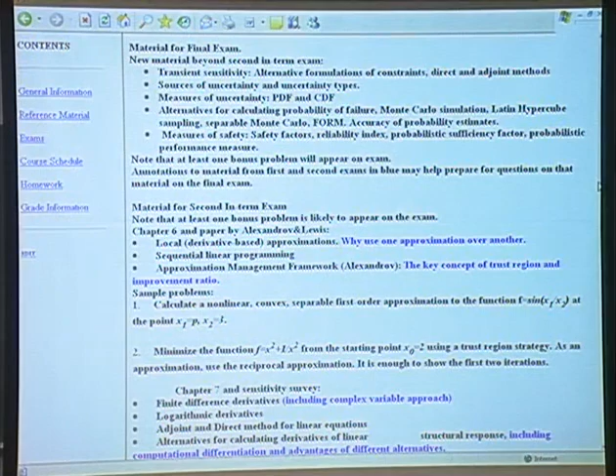What else? Yeah, so I put on the material for the final exam, and I added the new material, and also I added annotations. I was looking to see if I left out any methods that you may want to study, but I didn't find much. So let's first go over the new material. The transient sensitivity didn't appear in the second in-term exam, so that's the only material from the textbook which is in this additional material.

And so then we have the material on uncertainty, which are sources of uncertainty, measures of uncertainty, alternatives for calculating probability, and measures of safety. And again, one of the bonus problems will appear on the exam. And then I put in annotations for different approximations. For example, I said, why use one approximation over another? This was a problem in the test that people didn't pay attention to the concept of improvement ratio. I added the complex variable approach, and I also added the computational differentiation and advantages of different alternatives.

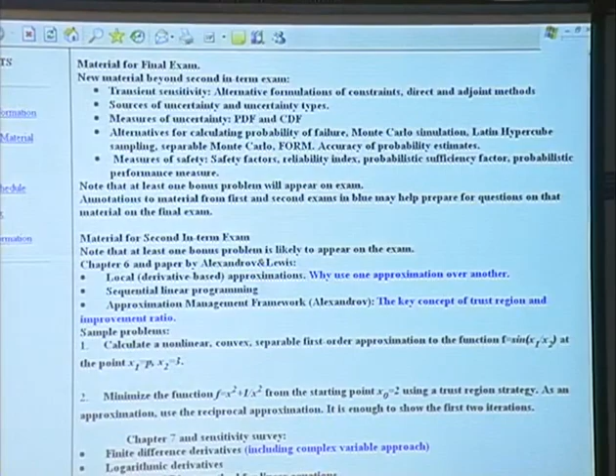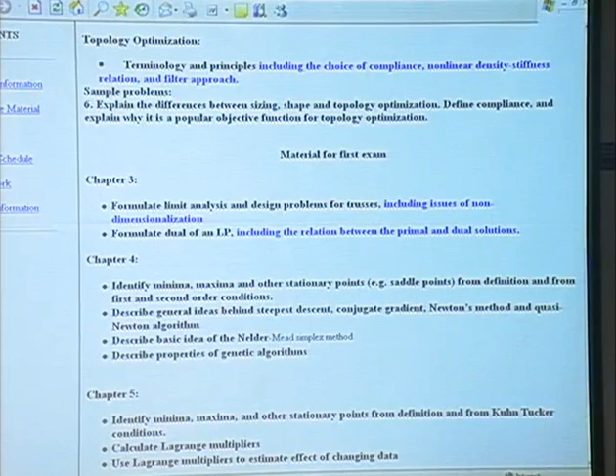In the topology optimization, I put in the same things that appeared on the exam. From chapter 3, the issues of non-dimensionalization and the relationship between the primal and dual solution. For example, that the primal is the dual of the dual. That is, the x's are the Lagrange multipliers of the constraints appearing in the dual formulations. I think that that's about it.

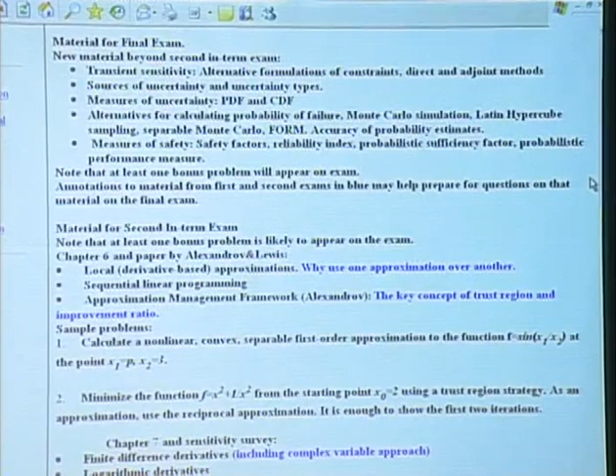So what I'm expecting to use the next few minutes is to deal with any questions that you have on the material or on the exam. Yes? I'm assuming that the time of the exam is 7:30 a.m., not p.m. Oh, yeah. Did I make a mistake or didn't I simply specify? You didn't specify. Oh, okay, yeah. Well, I just picked it up from the exam schedule. Yes, actually, I probably would have liked it better if it was 7:30 p.m.

Other questions? Yes. Grading. So whatever points we have now will be scaled down to 65 points, and then the final will be plus 35, or? Well, actually, it's going to be a bit more in your favor in that the bonus points are not scaled down. Okay. So you take your grade without the bonus point, multiply it by 0.65, take your exam grade times 0.35 and add the bonus points. So it's a bit better than...

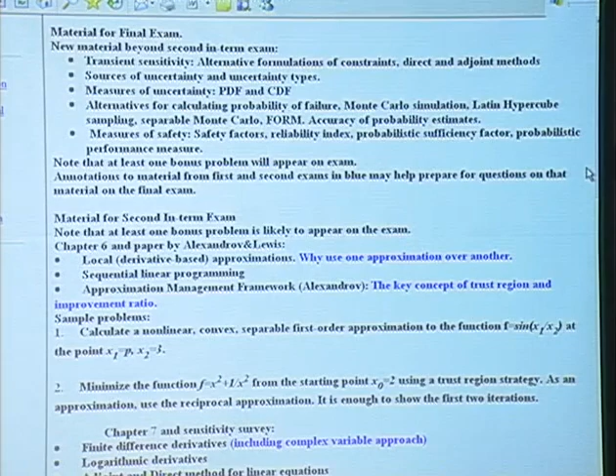That is, you have the options of doing the other problems too. And for example, if you are completely at a loss how to do the new problems, it may be to your advantage to do some of the old ones. Or you can have a less extreme case where the old problems are easier than the new one, even if you are not completely lost.

In terms of time, I'm hoping to avoid the time crunch. We have more than twice the time, that is 120 minutes compared to 50 before. So I'm aiming to increase the time over a midterm by about 50% instead of by 140% or so. So that hopefully you will not have to work feverishly until the last minute. Other questions? I'll give you a couple of more minutes to think about questions before we adjourn.

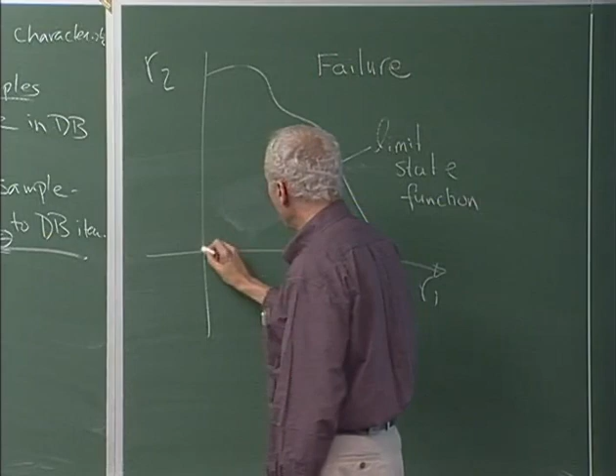And this is, let's say, failure. Sorry, the other way around. This is failure. The origin is the place where the random variables are at their mean value, because we assume that they are normal variables with a 0 mean and a standard deviation of 1.

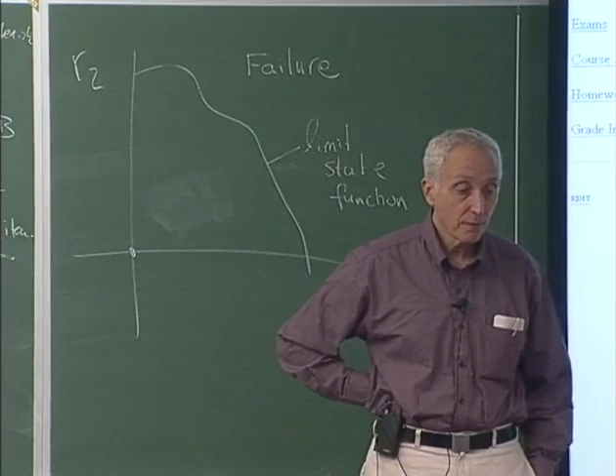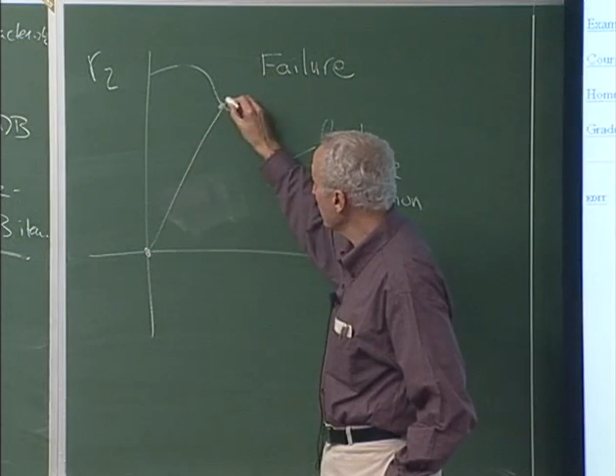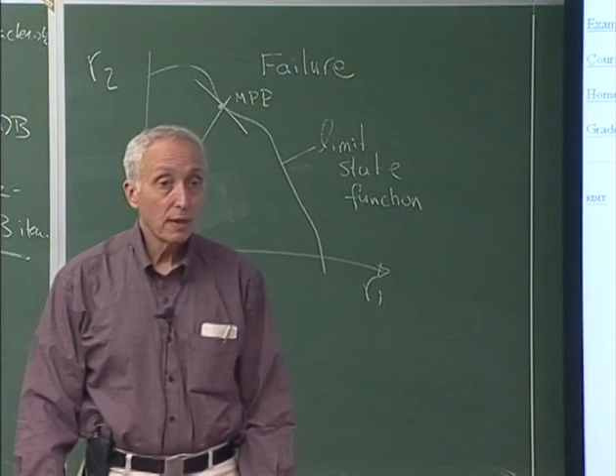And the point which is closest to the origin, in this case it will be this point, is called the most probable point. And we linearize the limit state function about that point, and then you can show that this distance is the reliability index.

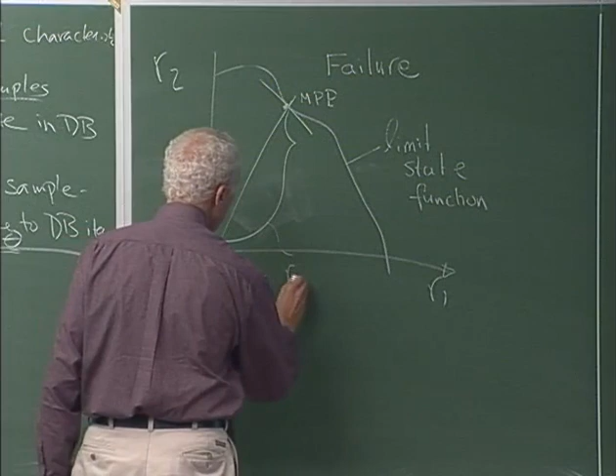Which is essentially the number of standard deviations of the limit state that are away from failure. So if the reliability index is 3, it means failure occurs when the limit state is 3 standard deviations from its mean value. 6 sigma would mean 6 standard deviations. So this is essentially the procedure of FORM.

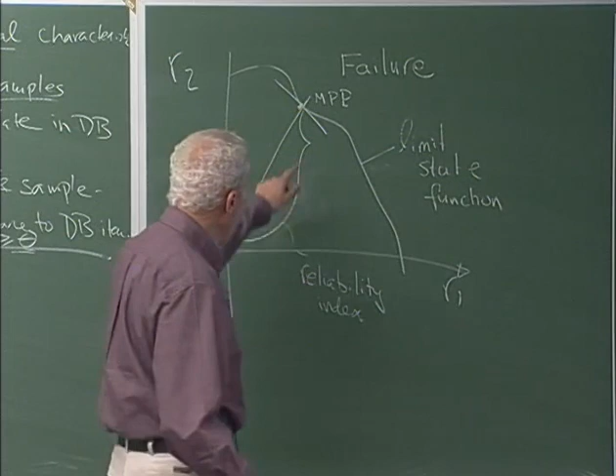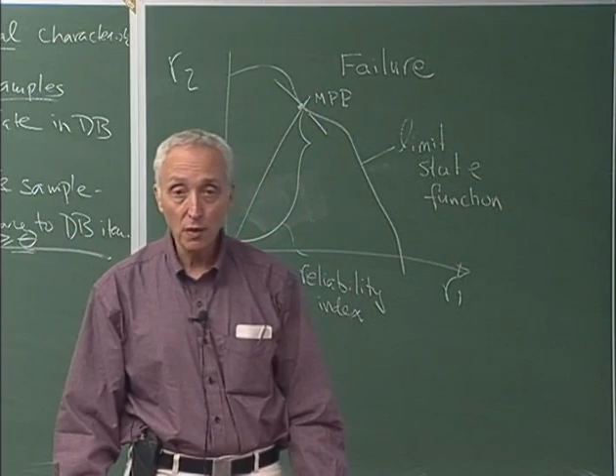And so the computational cost is simply to find this point. So this is sort of a constrained optimization problem where you look on the limit state, where is the point which is closest to the origin. Once you found it, the distance to the origin gives you the probability of failure. So that's what makes it inexpensive.

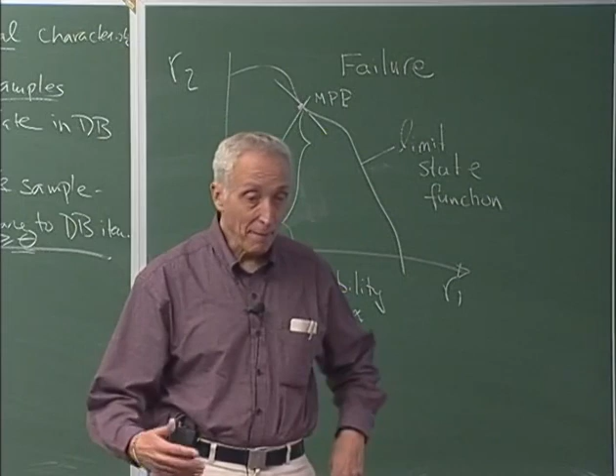Now, I don't expect you to know all of those details, just the basics. I'll certainly not give you a problem to go and calculate the probability of failure using FORM. So it's cheap because the only computational cost is to find the most probable point. Right. Well, there is some minor computational cost, which is the transformation of the random variables to standard normal variables.

But it is an approximation. The same way that the Monte Carlo method is an approximation. FORM is exact when the variables are really normal and when the limit state is linear. Under all other circumstances, it's only an approximation.

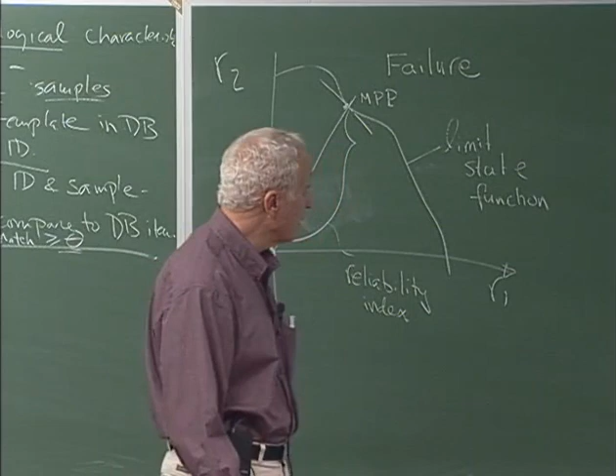FORM stands for first order reliability method. There is also a second order reliability method that takes into account the curvature here. But it doesn't change much. It just makes it a bit more complicated and a little bit more costly, a little bit more accurate.

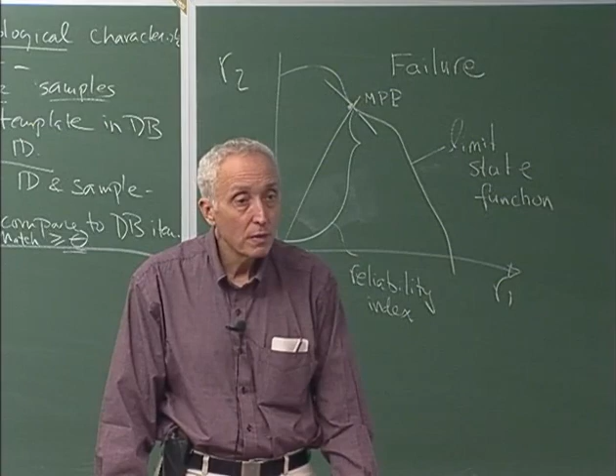Other questions? Yes. When you say in two examples or the bonus problems, you have let x be a standard normal variable N(0, 1), and then a response N(10, 1). I'm not sure what those notations mean. Okay. Capital N parentheses 0, 1. This is a standard notation for a normal variable, and the first number in the parentheses is the mean, and the second number is the standard deviation.

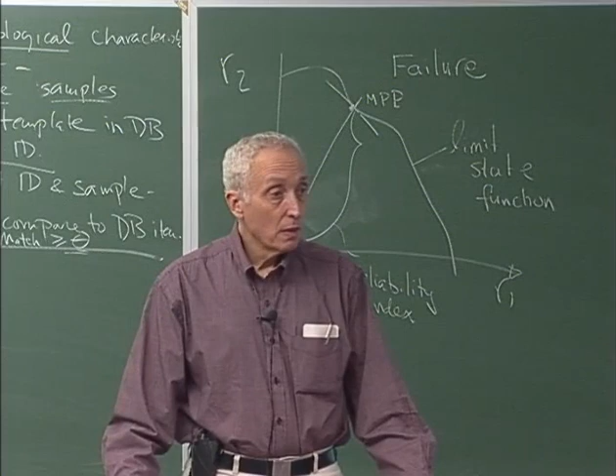Now, when you say U(0, 1), that means the variable can range from 0 to 1. Yeah. So this is a uniform variable that ranges from 0 to 1. Other questions?

Yes. About safety factor. When we give the safety factor, let's say like 50%, we increase the response more than we expect, right? Yeah, that is the way I define the safety factor. It's the ratio between the capacity and the response. If you design for a safety factor of 1.5, it basically means you multiply the response by 1.5 and you see whether it can be handled by the capacity.

In aeronautical applications, it's a little bit different in that you multiply the loads by 1.5 rather than the stresses. If you use linear analysis, it doesn't matter, but if you use nonlinear analysis, it can matter. In general, most people think of safety factor as the ratio between the capacity and the response.

So that means we're going to have the probability of failure. We have more chances to have the failure, right? More chances than what? More than normal. If, let's say, we don't have the safety factor. Okay, we have response and capacity.